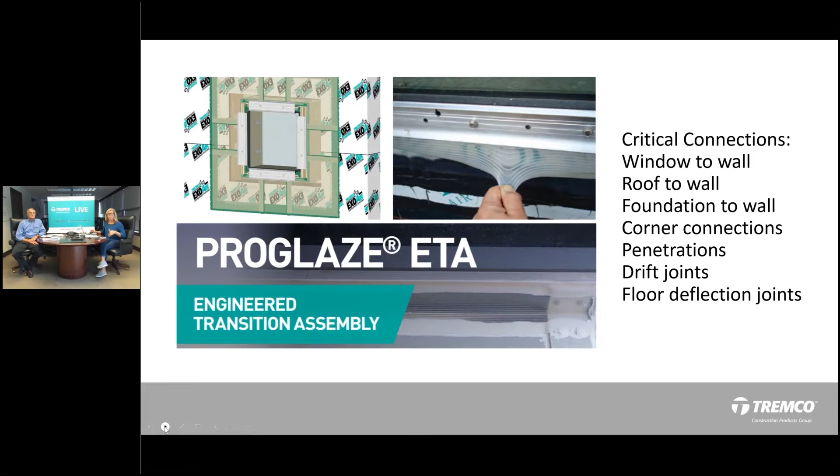What's great is, since this product has been around for over 10 years now, we've really grown within the product portfolio as well, as we always do. So as we speak to customers and as we're on projects with customers, we've really been able to evolve its capability to really meet those challenges on projects.

Here are some pictures and illustrations of how we have inside and outside corners. We have a variety of different systems, systems 1, 2, and 3, and then a variety of different connections that really help make that transition in your building enclosure. So that versatility is there.

And once again, you don't have to figure out which system you need, because we do have a design engineering team in Ashland, Ohio that will help you with that. That's a key part of what we do: working directly with the design professionals in the industry with our design engineering team to come up with a solution.

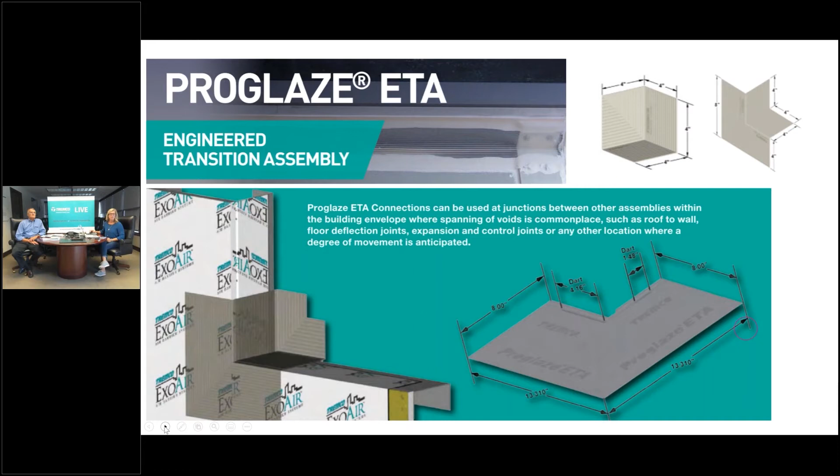Love this video that I'm going to share with you guys real quick here. So take a look at this video. Proglaze ETA stands for Engineered Transition.

And we talked about having technical difficulties, didn't we?

The connection from the glazing system to the wall where the air barrier is applied. In most buildings now, there's not just one type of facade on the building. There's lots of different projections, lots of different angles. And so we come up with different 3D molded corners that may be necessary to make those transitions.

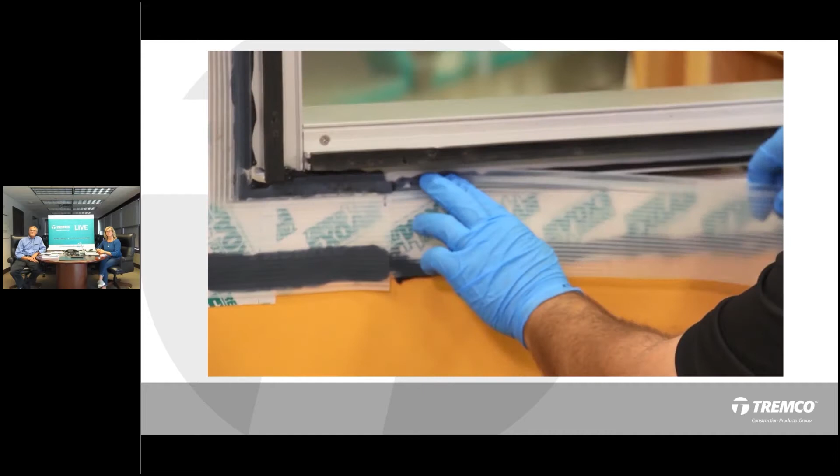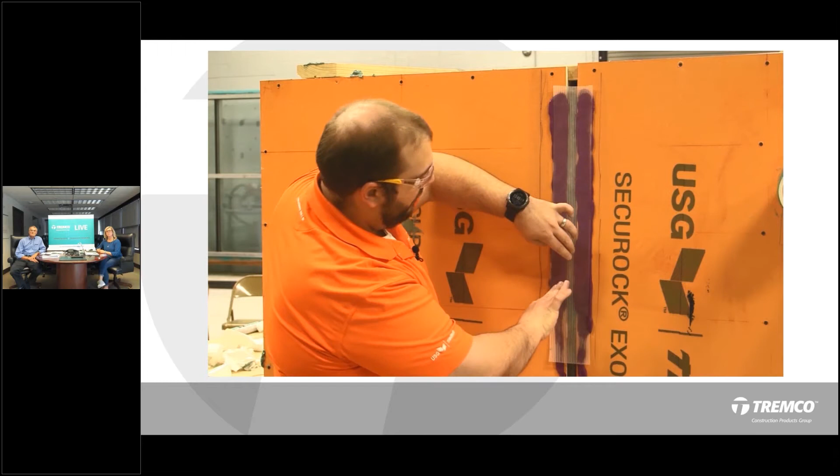It's made of a kind of translucent silicone, enabling you to see the amount of sealant to apply the ETA. And the silicone has over 200% elongation, so it's very durable. It also has ribs in the profile itself, which will prevent too much squeeze out of the sealant, ensuring a good bond with the substrate. You get better quality workmanship versus someone just filling a joint with sealant and walking away, not knowing if it's installed, did it bond, did they clean it right.

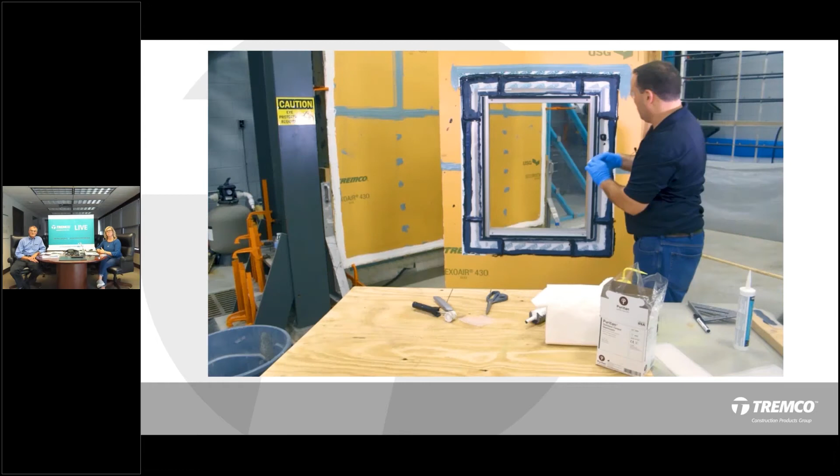If it does get cut or damaged during construction, cut out the bad area, or if it only has a puncture, cut a piece of ETA and just put a tire patch of sealant and gasket over it. And we've tested it in the Instron. It still does 200% elongation over those tears.

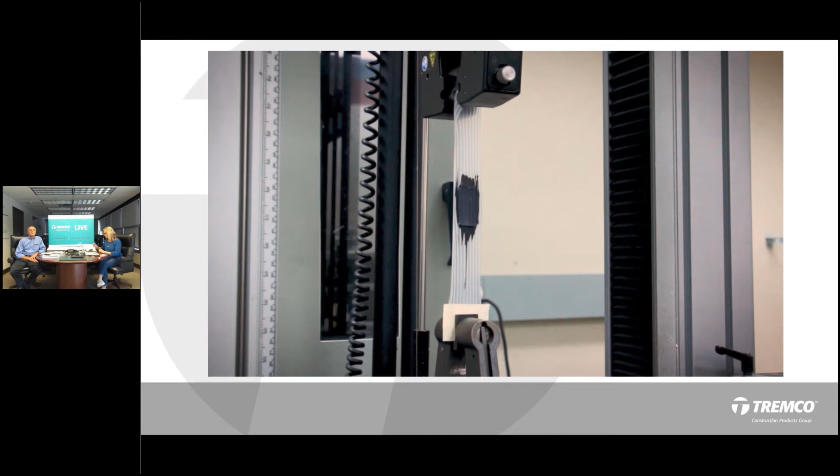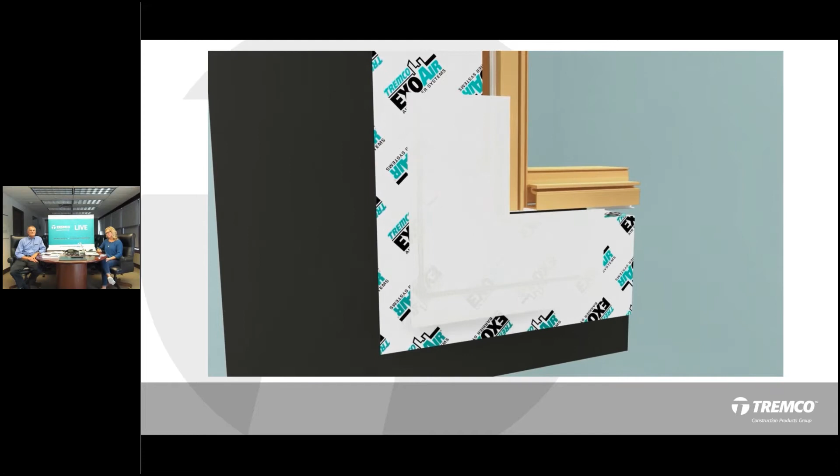We'll take the shop drawings for a project and really build what ETA system is best suited. And then we'll take those details and actually create a 3D rendering in sequence to show the contractor how to install this ETA system. So engineered transition assembly really defines what we're doing with that. We're specifically engineering these connections for that project.

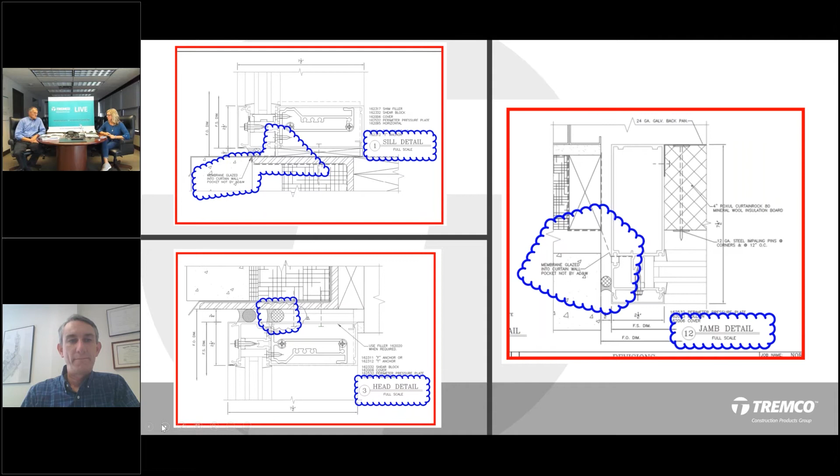I know these are some slides that you were able to share with me, part of your building commissioning classes that you teach regularly. So when I was down taking your class in Orlando, Florida, I was pretty excited to see that Proglaze ETA was a main part of your solution. I think you had to mention it generically in that setting, but I knew it was our product.

And I was pretty excited about it. So I think this is just another point that you wanted to bring up of giving options to the end user that aren't functionally equivalent.

Right, so this looks like it came from a master specification, and when you dig into the top left-hand corner, it's referring to another specification altogether. So you need to look at the different sets that are combined or interfacing with each other. But more importantly, within this spec itself, it's listing out 3 different products.

And while they all perform, you can get good air tightness from them, they aren't exactly equal, and they're definitely not equal on a price level. So you've got one that's a spray foam, one that's a modified bitumen membrane, and one that's like the Tremco Proglaze, which is a pre-cured silicone.

So making sure the designer selects out the right system that they want and the one that they're going to show in the details is important.

And here, when you give it to the contractor as 3 different options, unfortunately you lose control of what you're going to get, and a lot of times it's going to go to the one that costs the least amount, whether or not that works best for the project. So it's one of the things we always try to keep an eye on.

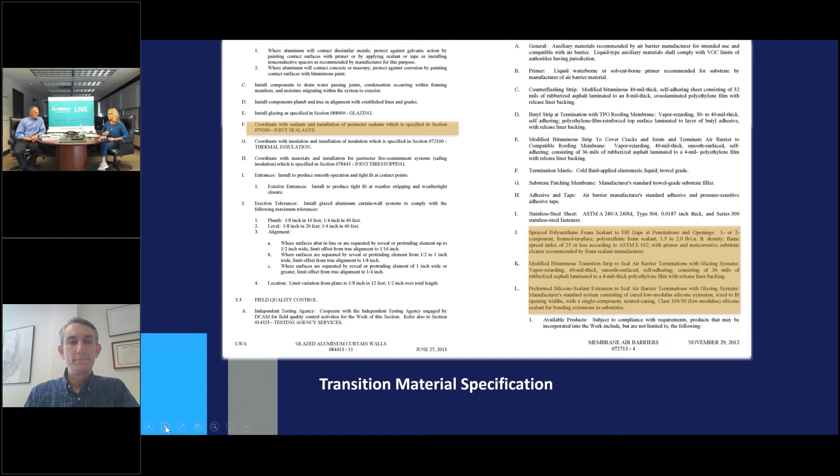Yeah, a lot of times we do them side by side so that you can visually see the difference. And then, of course, the testing a lot of times can show you the difference as well. Yeah, exactly. So this is a key part, I believe, of your communication process.

Brian, what do we got going on here? It's unfortunately sometimes the mock-up is the first time you get to see how something's going together, and all the details start to take form into one specific shape. And so what we saw here is we had already gone through the details.

The details had called out for silicone sheet around the perimeter of the opening, actually having it turning into the glazing pocket with the Proglaze bead. And when we got the shop drawings, that same information kind of got copied onto the shop drawings and came through.

What the contractor didn't mark up was that, what they kind of did, and it was redlined but never really clarified, was that the glazing pocket was going to be closed, and so you couldn't get the silicone membrane into the glazing pocket, and instead you had to turn it onto the side or face of the curtain wall as it sticks out of the building.

But when you get closer into some of these pictures, when the contractor went forward to do the work, they ran into problems where there were projections for a plate at the bottom of the curtain wall that also cut into the silicone membrane. It just became a much more difficult detail to put together because they didn't plan for it appropriately in the beginning of the project, nor did they have those 3D sketches helpful. Yes.

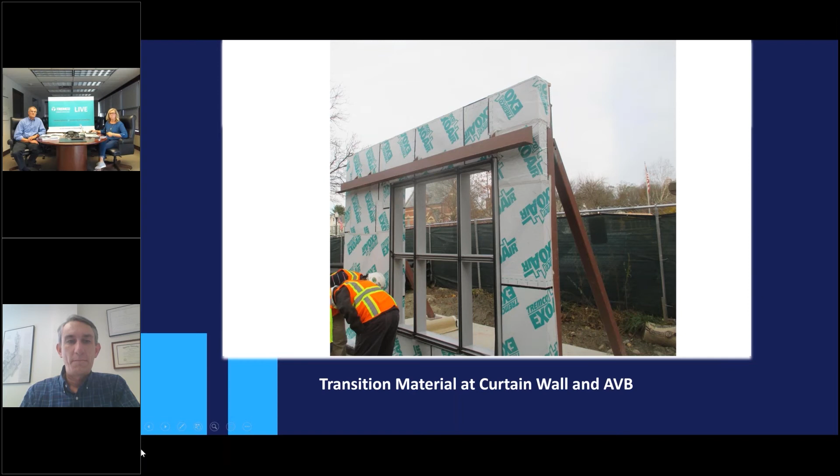So overall, I think there are still some challenges you faced, and this just goes into greater detail of it. It's hard to see on the left-hand side, but that piece of aluminum pocket filler is part of the frame. He also didn't miter the corner very well here, but with that pocket filler being closed, you couldn't take the silicone membrane from the face of the wall and the air barrier straight into the pocket.

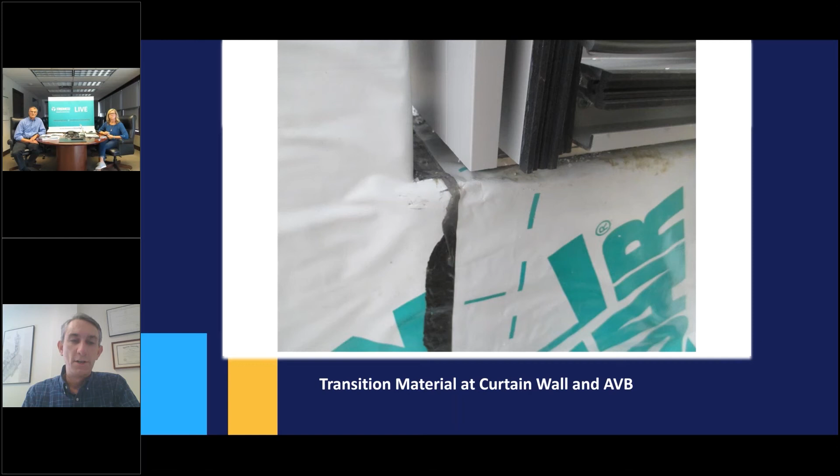And when you click on the next picture, you'll see that what we have here is kind of a prefabbed corner that they made themselves, turning it onto the face of the aluminum, and then trying to notch out and work around this projected attachment plate became very, very sealant dependent.

We had some concerns the first time we were on site, and so we postponed testing until we came back a second time to take a look at it. They had remedied a couple of the conditions, but basically had to add more sealant as well.

And so running through the tests, the system didn't work, and that's because of the way they had tied in those corner details. So they had to go back to the drafting board, and that's where we got Tremco's field representatives involved in coming out to assist the contractor with the detailing.

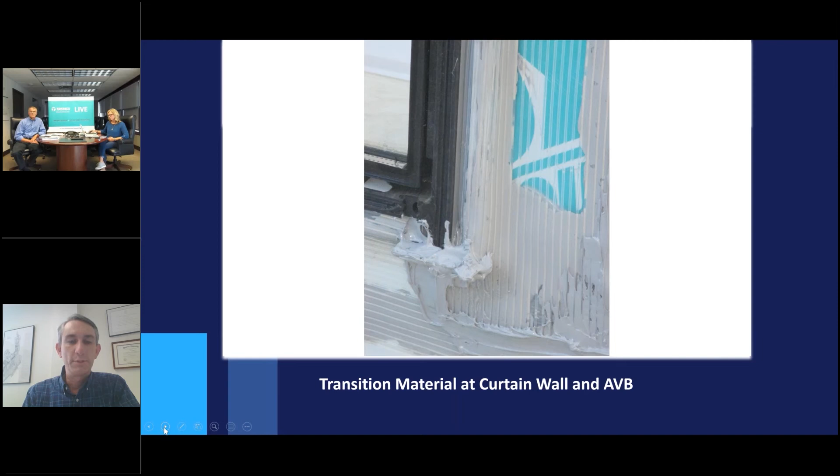I believe this is another shot of it, but we'll get to the recommendation shortly. That's the point where we had the failures. You can see the membrane's been sliced to work around it, and it's very difficult to get those types of shapes to work properly.

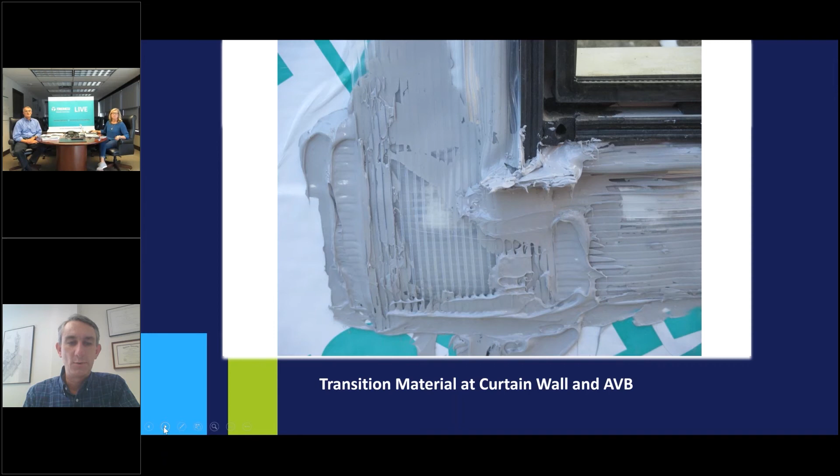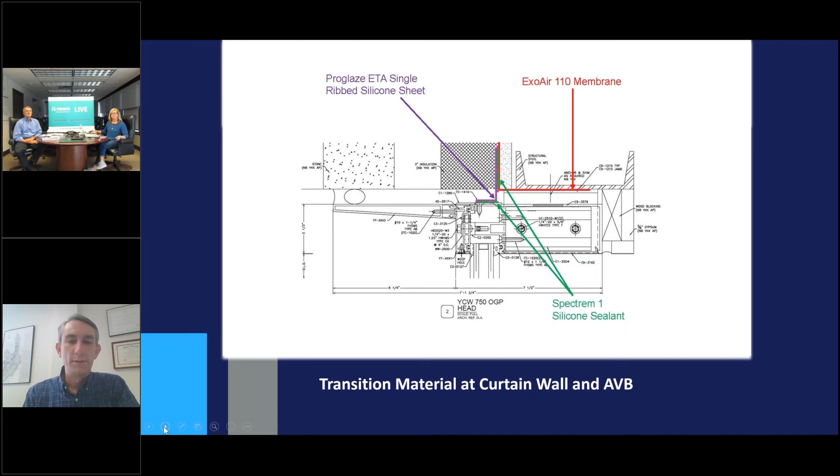And so when you go to the next one, I think we start to see some of the manufacturer provided details on how the system should be installed and how you terminate it to the frame. So this is a couple of these here, the head detail.

Well, and I think that's the key part of it. I mean, I can't imagine having to detail that picture with those other options. The other options were a rubberized piece of membrane or spray foam, so all of those would have had even more challenges than the Proglaze ETA.

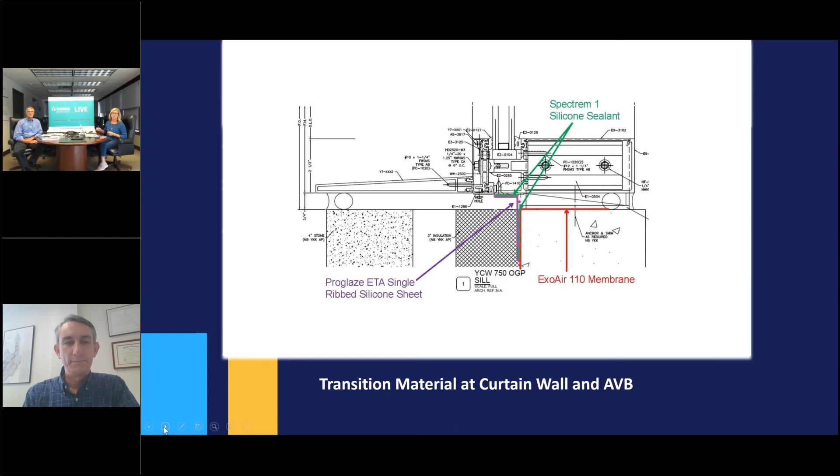But the beauty of the experience we've had is that we've been able to come up with solutions like this. So instead of manipulating it in the field, we've got pre-molded corners, and when the molded corners can be used, it's very helpful because it takes that workmanship at the corner away.

And now you're just dealing with the lapping joints, and you're not at the corner, but in the middle of a field somewhere. It's a much simpler detail and takes less workmanship to put together well, because at that point you've got just two sheets overlapping via sealant and being rolled.

I was going to say, Brian, one of the things we always like to say is we try to eliminate decision making in the field. Yeah, and this certainly does that.

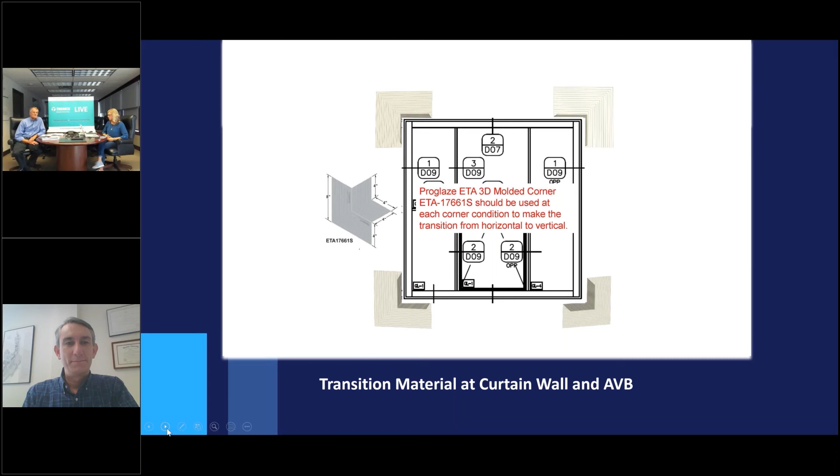Well, and I always like to look at it, there's so many different types of technologies out there, and I always like to look at it from the points of concern, right? So you could do a lot of different things with these connections, but how many points of concern do you have? They keep going up, right? So having this kind of pre-cured membrane and having inside and outside corners, those points of concern are lessened, which is great. So we like that capability for sure.

And this just further shows how that detail would look with that molded corner being used to make that transition.

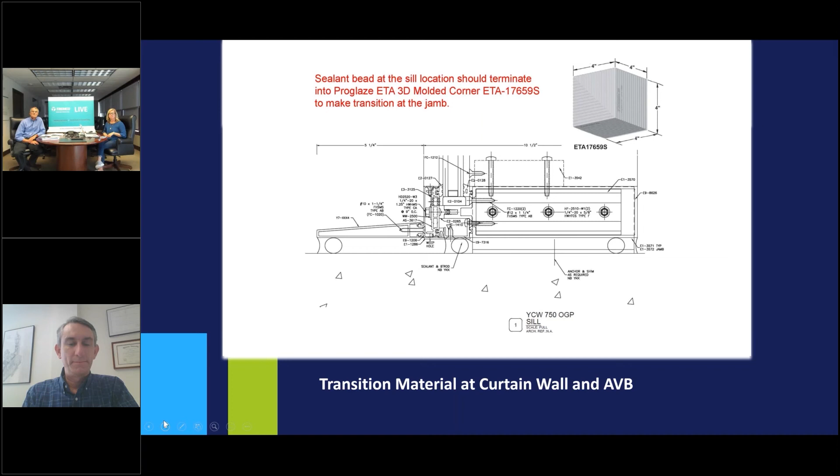I think we have a few more examples. I know this was part of your training, so you'd like to include that information. And I'm very excited about all the different types of technical information that's available to our customers to use.

And as you mentioned, Brian, when you had that issue in the field, obviously I'm assuming you reached out to your Tremco sales rep. Do we need to give him a shout out right now? We could, we worked with Tony on this. He was very helpful in putting together those sketches for us.

A lot of times when we're doing the commissioning work, we're not specifically providing details. That's where it's important to grab some manufacturer information and relay that to the contractor and architect who needs to come up with the design details. We're just trying to make sure they're all heading in the right direction and getting the right product and performance at the end.

But Tony Hayes did a great job. He's always easy to reach and helps out with these cases whenever we need that assistance.

Paul always likes to say belly to belly. Yes, that's what built the company starting in 1928, Marcy. And even though we're socially disconnected now, I mean, it's interesting, I pretty much approve all the travel right now, and all the travel is for technical field support. That's pretty much all the travel we do. Still have to do it today, right?

Got to get on the job. Got to get on the job. So it's a key part of it.

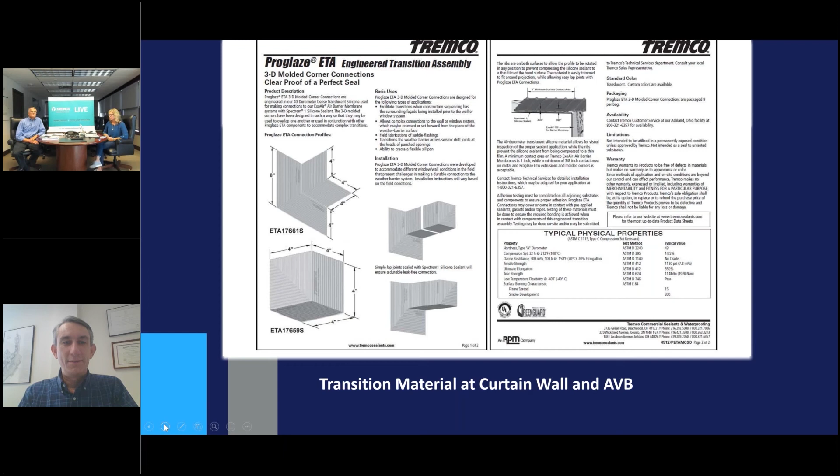Tony Hayes obviously is a key component of the detailing and servicing of that region, handling regional specific needs. And then he's got the ability to reach back to the technical counterparts here in Cleveland and in Ashland, Ohio, to provide these solutions. So we're pretty excited about that whole way to service the customer.

I think there's a few more pictures here just showing how this solution can solve a variety of applications. This picture is from probably 2008 or 2009. It's a chemistry lab, so it must have been one of the earlier uses of the material.

Here the contractor's basically keeping just ahead of the mason as he tries to move up his brick wall. They're going in there a day or two before, trying to carry the transition membranes up onto the curtain wall. The curtain wall itself wasn't quite ready yet either - you can see it's still being glazed as they move forward. So they really were right on top of each other's heels as this job went forward.

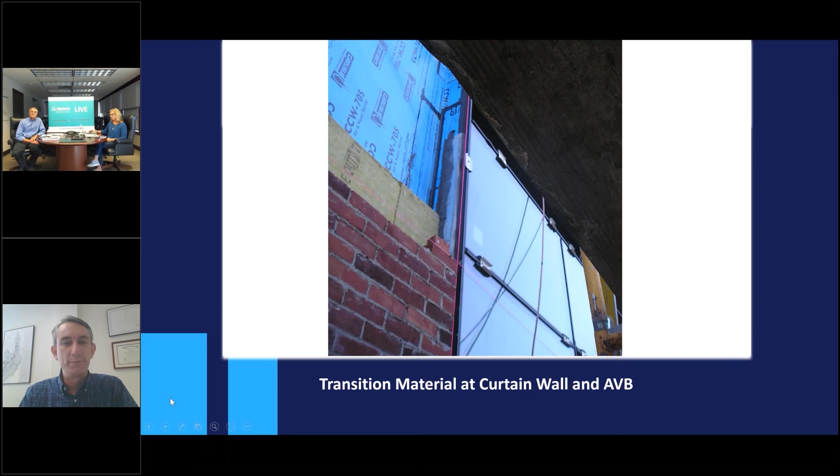Yeah, sequence of installation can certainly solve a lot of those issues, but we definitely want to have communication ahead of time, because what we don't end up seeing generally when we're looking at details is what it can look like when it all comes together in the field.

I can't imagine those other technologies even trying to compete with that, but at least we know with that pre-cured extrusion being able to elongate 200%, we're going to have a much better fighting chance to make sure that we get that detail properly.

This is what happens when the mason's ready to go. He leaves a little window there for you to get your silicone membrane into. At the same point, the curtain wall had to be reset, so they couldn't turn the membrane into the curtain wall - it was one kind of error after another. But with the limited access there, they were able to get the silicone into the glazing pocket when the window was finally ready, tying it back into the air barrier membrane.

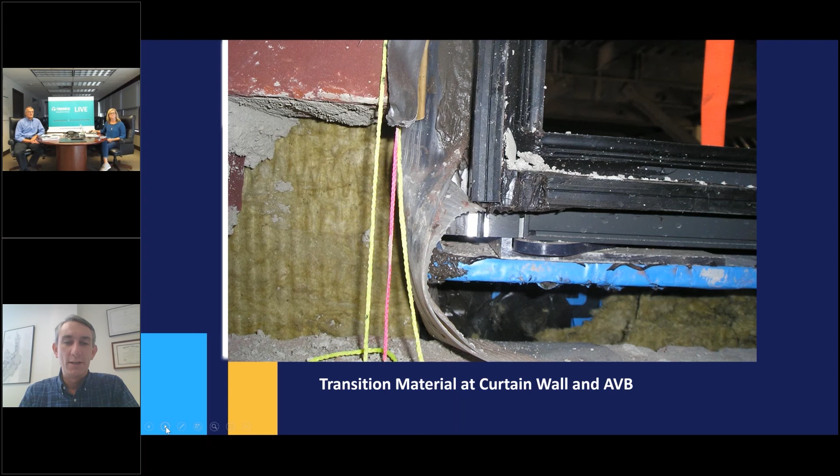One thing they need to be careful of is fasteners. When this material is installed beforehand and the curtain wall installation occurs afterwards, those fasteners can penetrate the membrane, and that needs to be clearly coordinated so that it happens through the silicone sealant and not through the membrane. We'll probably get to that later.

Yeah, that's the one there. I zoomed ahead for the essence of time and because it made sense. So absolutely, we always make sure that we coordinate and try to explain - if you're going to fasten, do it through the silicone sealant and not the membrane itself. So that we've got that solution.

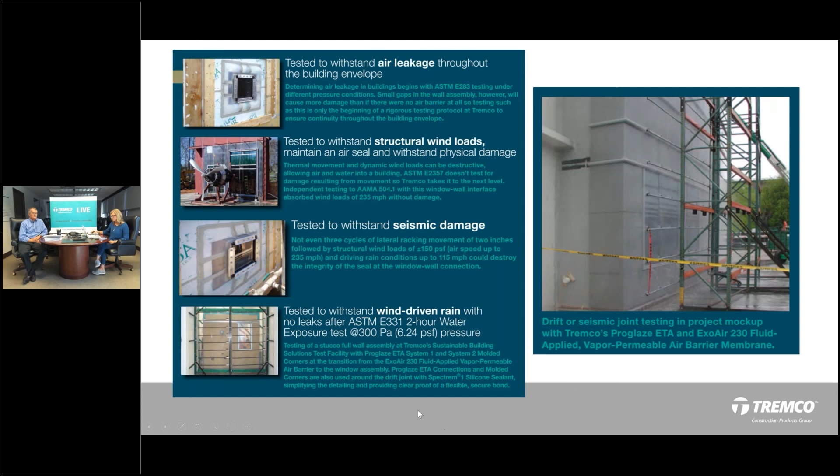But I always like to close - we thanked Brian for joining us. Next week, Paul, we've got the project profile of Bank of America. Love that project, every time I see it I get little goosebumps. It's a pretty cool one to talk about, a cool story. I look forward to sharing that next week. It'll be fun to share, and we'll round out our glazing month because we talked about a variety of different glazing solutions, and this is just one more glazing solution. Pretty excited about that.